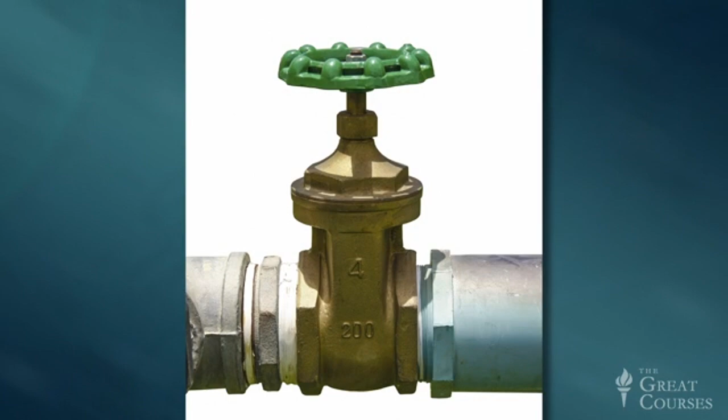But there's a larger usability issue with this faucet design. Another common convention is that rotating a knob to control flow should be analogous to turning a bolt. Clockwise rotation tightens a bolt, and thus it should reduce flow. Counterclockwise rotation loosens a bolt, and thus should increase flow. The valves in your plumbing system operate this way. And the convention makes sense, because many such devices actually do use a screw to open and close an internal stopper, as you can see here.

Now, according to this convention, both knobs on this faucet should close with clockwise rotation, like this, and open with counterclockwise rotation, like this. The problem is that some manufacturers disagree with this convention. They propose an alternate paradigm that controls intended for two hands should reflect the symmetry of the human body, and thus should operate as mirror images of each other, like this.

Well, this concept is quite attractive in theory. But as we engineers are fond of saying, in theory, there should be no difference between theory and practice. In practice, there is. When this mirror image paradigm is applied to a faucet with two knobs, three distinct problems arise. First, we're so conditioned to the traditional convention that when we encounter this alternative convention, we'll invariably turn one knob or the other in the wrong direction on the first attempt.

Second, even if we're expecting the mirror image paradigm, there's no clear convention for which direction is on and which direction is off. So we'll still get it wrong on the first attempt about half the time.

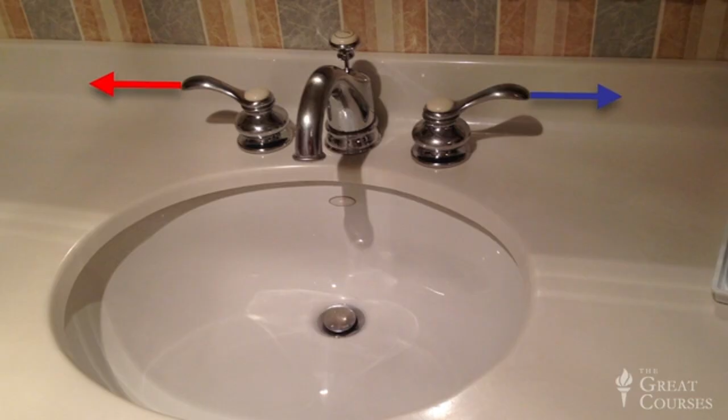Applying the mirror image paradigm to faucet knobs is unequivocally bad design, particularly because the inherent flaws in this paradigm can be so easily corrected. This faucet uses the mirror image paradigm, but its mode of operation is crystal clear, thanks to the simple substitution of handles for knobs. When the faucet is shut off, the handles are both pointed outward, a clear signal that the mirror image paradigm is being used.

It's also clear that both handles must be rotated forward to turn the water on because there isn't enough clearance behind them to allow rearward rotation. Furthermore, the shape of the handle sends a subtle message that they're to be grasped and pulled, further reinforcing our intuition about how they should work. For all these reasons, it's nearly impossible to operate this faucet incorrectly.

Yet another advantage. With the water running, the position of the handles provides a visual indicator of the state of the system. Here, for example, we can instantly see that the stream of water is mostly cold with just a little bit of hot. Knobs don't provide this sort of real-time visual feedback.

Now, these examples illustrate three important points about design for usability. First, the difference between poor design and good design can be quite subtle, but the effects are often dramatic. Second, solely by virtue of their shape, size, and placement, physical objects send us subtle messages about how they can or should be used. These messages are called affordances. And high-quality design invariably takes advantage of affordances to improve the interaction between technological devices and people.

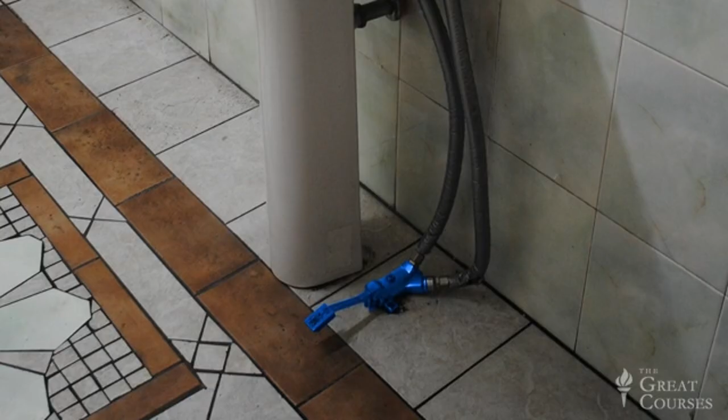I had given up in frustration when the guy next to me said something in Italian, and then he pointed to this foot pedal below the sink. So this was a hands-free sink, but not the type I was expecting. The most common design flaw in hands-free devices is that they lack clear indicators of where the proximity sensor is and how we should interact with it. In Don Norman's lexicon, they lack signifiers.

And only after I finally succeeded in eliciting water from that hidden spout did I realize that my trials and tribulations had also been exacerbated by a considerable time lag between the activation of the sensor and the flow of water.

A feedback issue that's all too common with these evil devices. The sink is the quintessential example of the pitfalls inherent in pursuing style over substance. It looks beautiful, modern, sleek, and uncluttered. But from the perspective of usability, it's a total disaster.

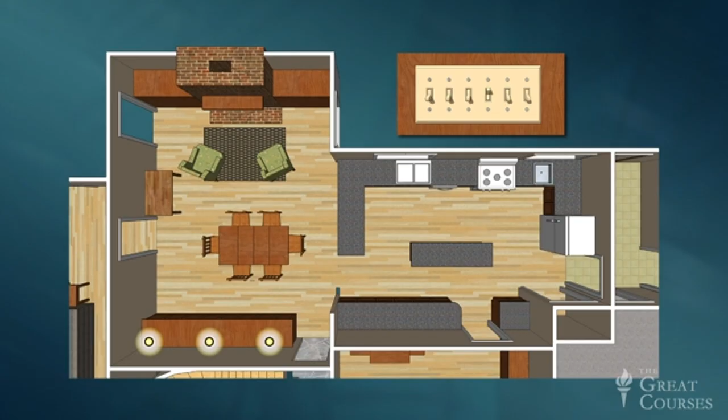This is the floor plan of my kitchen. On this wall is a row of 6 identical light switches. When I flip these switches in order from left to right, the following lights are illuminated. 1, 2, 3, 4, 5, 6. Note that there is no spatial logic to this arrangement whatsoever. And so, even though I've lived in this house for over 2 years, I still select incorrect switches several times a day.

Recognizing that poor light switch mapping is a big systemic problem, Don Norman has developed this fundamentally new concept, an angled panel that displays the floor plan of the room with switches placed in the locations of the lights they control. This is a beautiful design, but thus far it hasn't drawn much attention from either the lighting or the construction industries, probably because it represents such a radical departure from the status quo.

Next, constraints are physical limitations that communicate how a device can or can't be used. The 3-prong plug is a superb example. It's physically impossible to insert this thing into a wall socket in any orientation other than the correct one. A less successful example is the universal serial bus, or USB plug, that's used to connect peripheral devices to your computer.

The USB is successful because the plug will only fit into a USB receptacle in the correct orientation. But it's not entirely successful because the correct orientation is rarely obvious, particularly when the receptacle is oriented vertically.

And finally, our interactions with technology are greatly facilitated by responsive, meaningful feedback. When I press an elevator call button and it lights up, I'm satisfied that an elevator is on the way. But when I press this button at a pedestrian crosswalk, and there's no visible or auditory confirmation that my input has been received, I get increasingly frustrated as time passes.

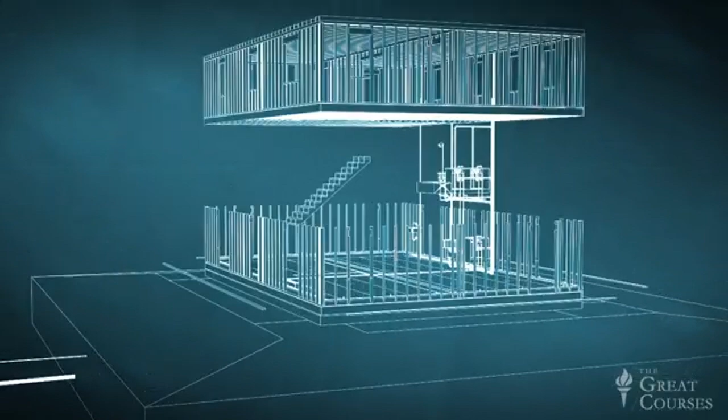For the next 4 lectures, we'll be departing from the comfortable, well-appointed world of your home's living space and entering the austere and occasionally greasy environment of your garage to explore the major technological systems that constitute your automobile. Automotive technology has an immense influence on our everyday lives. When our cars are working as designed, they provide us with nearly unlimited mobility. And when they aren't, well, few events are more disruptive to our everyday lives than an automotive breakdown.

Automobiles are among the most expensive products we purchase. Yet, our ability to make these purchases wisely is often hindered by the bewildering array of functional, aesthetic, and technological alternatives available in the marketplace. In a broader sense, the automobile has also had profound influences on our society, culture, economic development, land use, and environment. Some of these influences have been extraordinarily positive, others dangerously detrimental. All of them derive, at least in part, from the nature of the technology itself. For all these reasons, it's very much in our interest to know more about these machines and how they work.

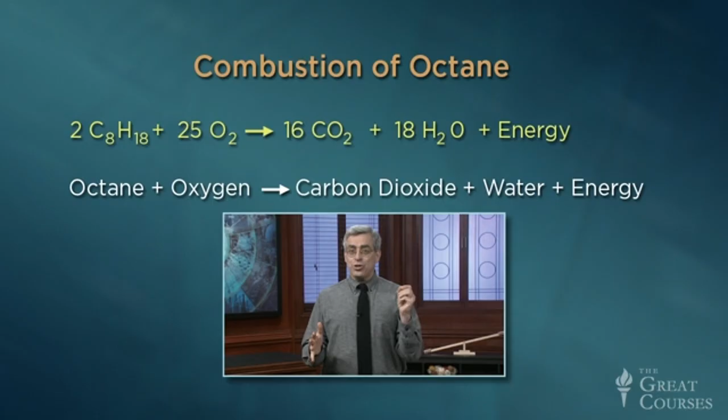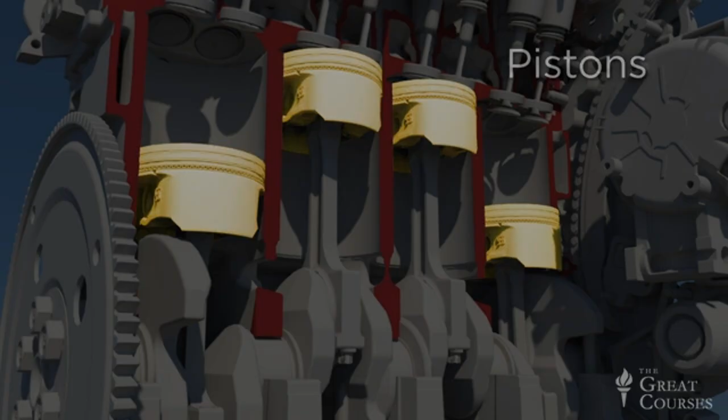The combustion reaction takes place within cylindrical cavities that have been machined into a solid block of iron or aluminum, called the engine block. These cavities are called cylinders, and they're just large enough to accommodate metal pistons sliding up and down within them. Near the top of each piston are several grooves, which hold metal rings that provide a tight seal between the piston and the cylinder walls.

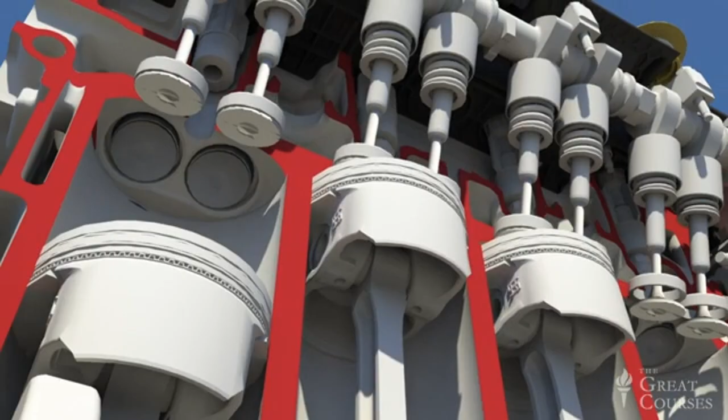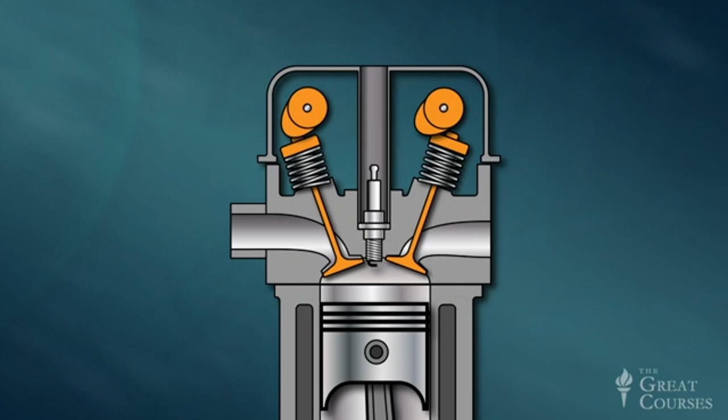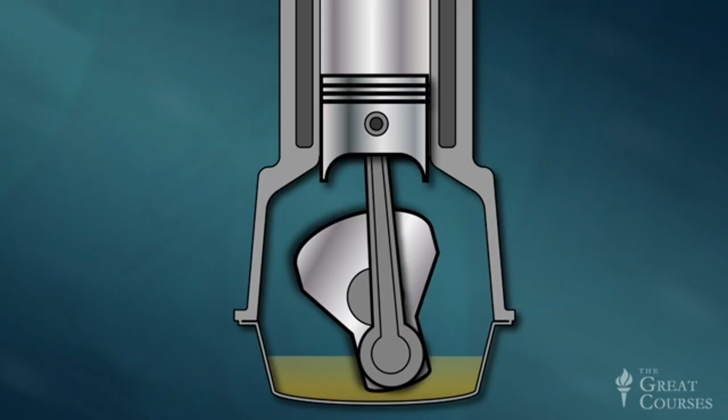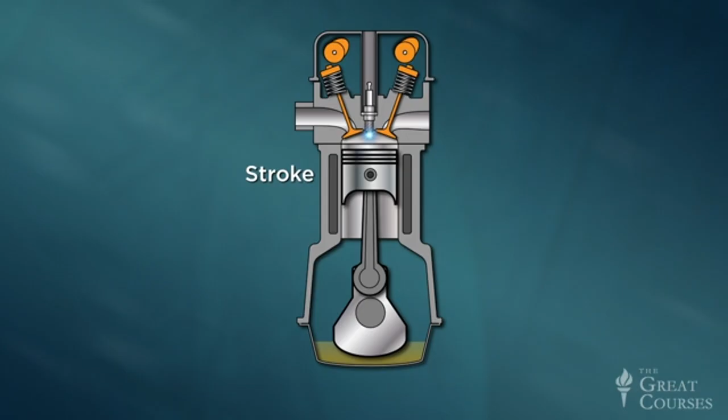And here's how it all works. The up and down or reciprocating motion of the pistons is translated by the connecting rods into rotational motion of the crankshaft, which then delivers mechanical power to the vehicle's drivetrain, the subject of our next lecture. The distance each piston moves within its cylinder is called the stroke, which extends between this position, called top dead center, and this one, bottom dead center.

When the engine is running at normal operating speeds, the pistons are cycling up and down many thousands of times per minute. And because the mass of each piston must be accelerated from a dead stop at the start of each stroke, the engine's efficiency is enhanced by keeping the pistons as light as possible, and that's why they're hollow.

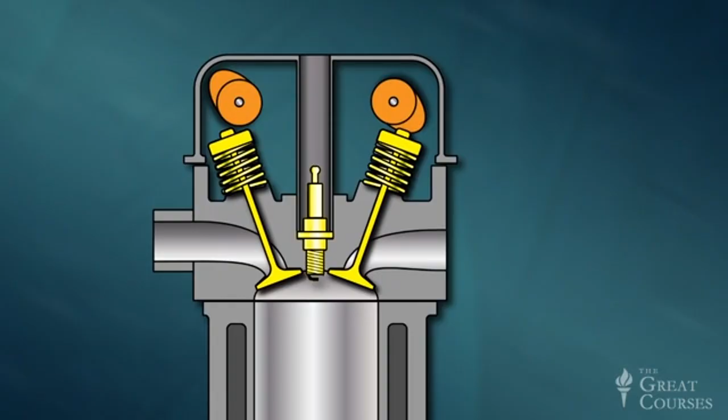Each cylinder is equipped with an intake valve, an exhaust valve, and a spark plug, all of which are mounted within a heavy metal lid called the cylinder head. As this cutaway of a cylinder head shows, the two valves are used to close off intake and exhaust ports, which are cast directly into the head.

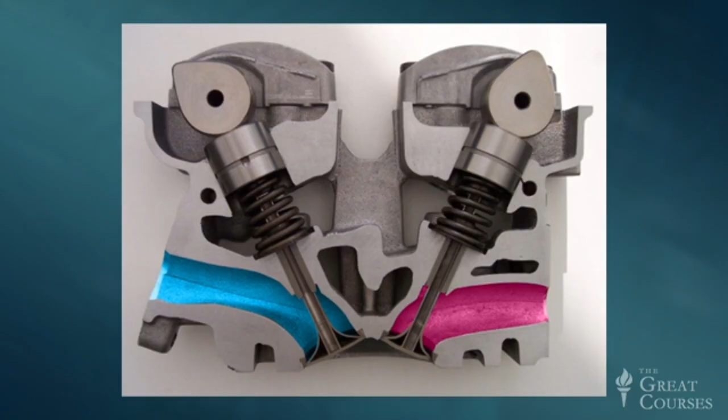Now, we'll discuss many more components of this engine shortly, but these, the cylinder, piston, connecting rod, crankshaft, valves, ports, and spark plug, are the ones that are directly involved in the process of producing mechanical power. So for now, let's focus on this process.

Most automobile engines operate on a 4-stroke cycle, meaning that each piston moves through a sequence of 4 different strokes, each with a specific purpose, and this 4-stroke sequence is then repeated over and over again for as long as the engine is running. We'll begin by examining the 4-stroke cycle for an engine with a simple carburetor, and then a bit later, we'll see how it works with the carburetor's modern replacement, fuel injection.

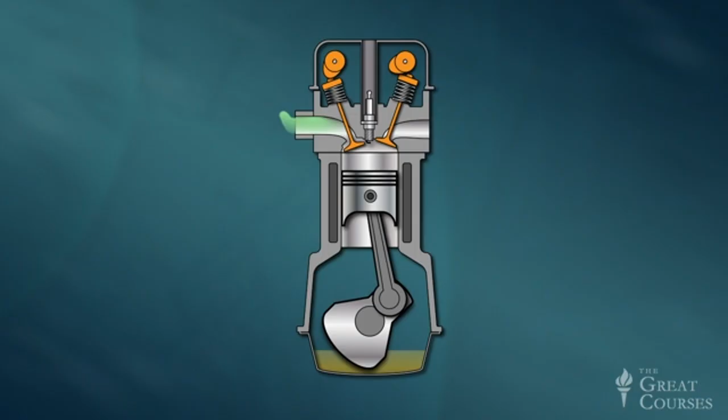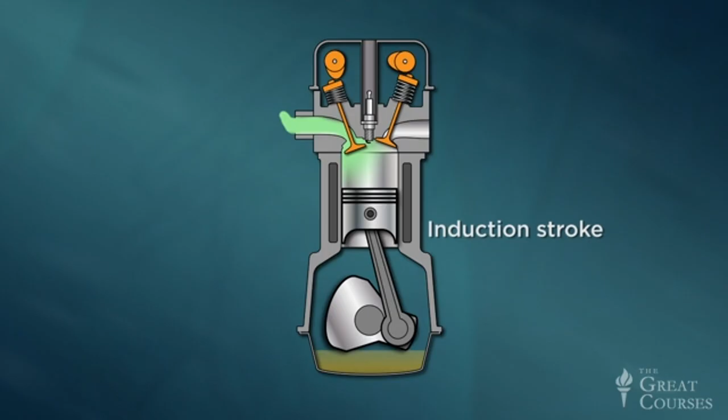The first of our 4 strokes is the induction stroke, during which the piston moves downward in its cylinder and the intake valve opens. A mixture of fuel and air is drawn from the carburetor through the intake port into the cylinder, and then the valve closes. Now, during the compression stroke, the piston moves back upward. Both valves remain closed, so the fuel-air mixture is now compressed and its temperature increases simultaneously.

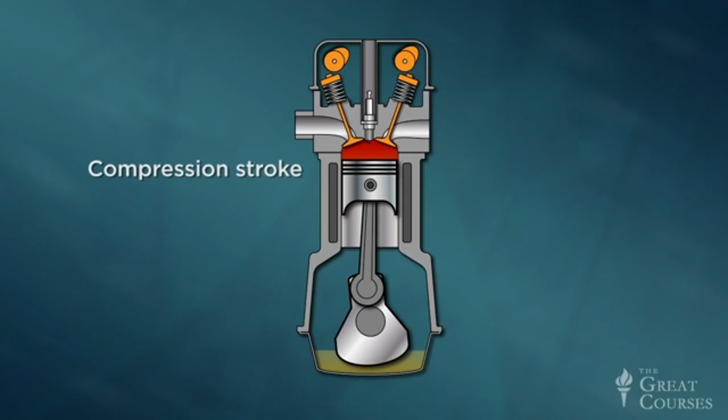Just before the piston reaches top dead center, a pulse of high voltage is sent to the spark plug, causing an electric arc to jump the gap between these 2 electrodes. This is essentially the same phenomenon we identified as flashover in our lectures on electric power transmission and distribution.

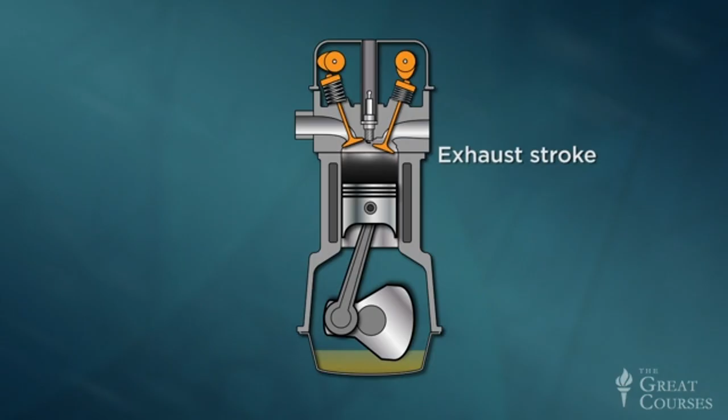Within the cylinder, this electric arc ignites the compressed fuel-air mixture, initiating the combustion reaction we discussed earlier. The resulting heat causes a very rapid increase in pressure, which drives the piston back downward, and this is the power stroke. Finally, during the exhaust stroke, the exhaust valve opens, and the piston moves back upward, expelling the cylinder's contents into the vehicle's exhaust system.

These contents include the 2 byproducts of the combustion reaction, water and carbon dioxide, plus a lot of nitrogen, a major constituent of the air originally introduced into the cylinder. The exhaust also includes a small amount of pollutants: unburned fuel, carbon monoxide, which is produced by incomplete combustion, nitrogen oxides, produced by the unintended reaction of nitrogen and oxygen, and soot. We'll see what happens to this stuff when we discuss the exhaust system shortly.

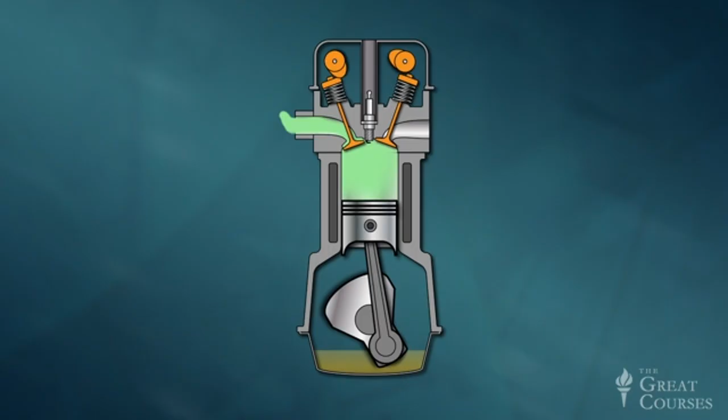Note that in the 4-stroke cycle, each stroke corresponds to 1/2 rotation of the crankshaft, but power is produced during only 1 stroke. So what keeps the piston moving up and down during the other 3 strokes? Why, the other pistons, of course. This is the principal reason why most automobile engines have 4 or more cylinders. The 4-stroke cycles of the cylinders are staggered, such that each has its power stroke at a different time.

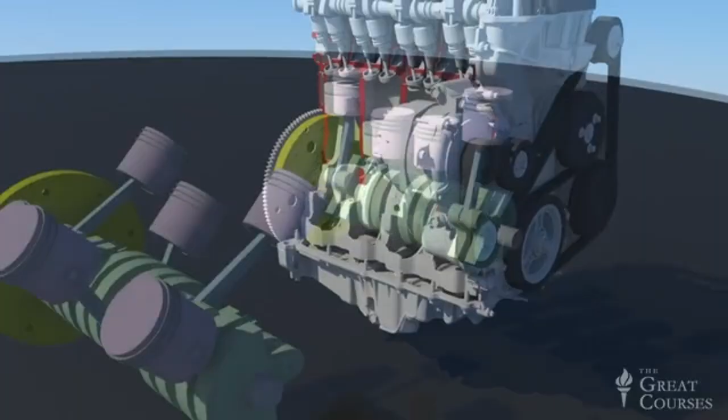Cylinders can be arranged in these 3 different configurations: inline, V, and horizontally opposed. Note that in each case, the firing order is designed such that power strokes from different cylinders are delivered at different times. So the intake, compression, and exhaust strokes for a given cylinder are driven by the power strokes of the other cylinders. Note also that the motion of the pistons is always balanced.

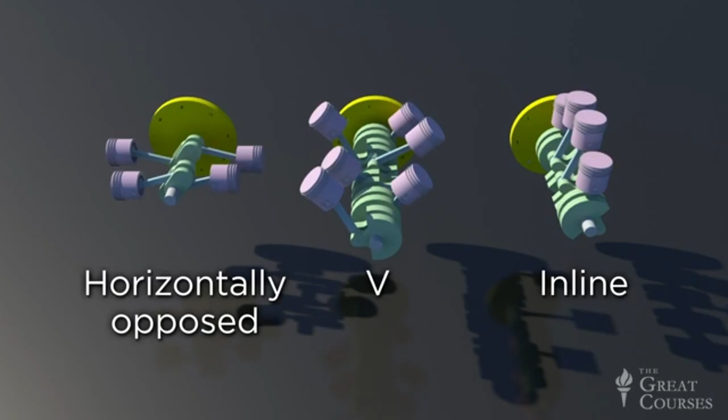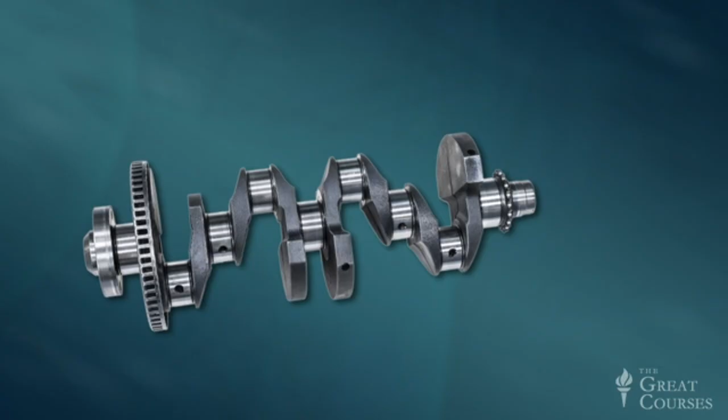At any given moment, half of the pistons are moving upward or outward, and the other half are moving downward or inward. If they weren't balanced in this way, the engine would vibrate tremendously. The alternating motion of the pistons is controlled by the crankshaft, which has three important characteristics worth noting.

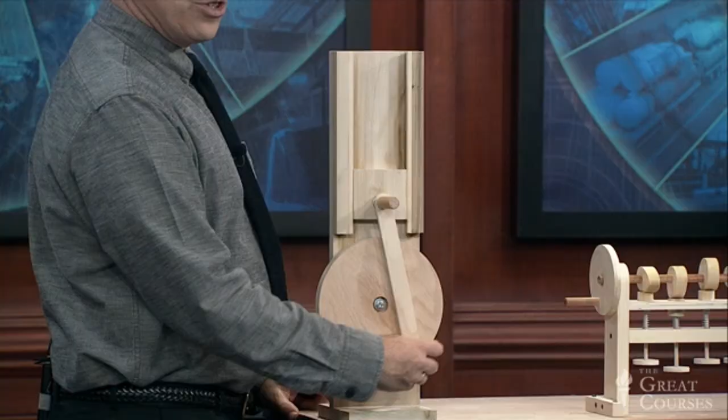First, these offset sections of the shaft, called crank pins, are the mechanism by which the reciprocating motion of the pistons is converted to the rotary motion of the shaft. In this sense, the crankshaft really works like any other crank. This model illustrates how a simple crank converts rotary motion into the reciprocating motion of a piston through a connecting rod. The system works in the other direction as well, like this.

But note that it doesn't really work as well, because the piston tends to get stuck either at top dead center or at bottom dead center, where vertical movement of the piston won't turn the crankshaft. This is another reason why automobile engines have multiple cylinders, so each cylinder can have its power stroke in the position where the resulting torque is maximized, like this, and when it's in this position, bottom dead center, a different cylinder will keep the crankshaft moving, like this.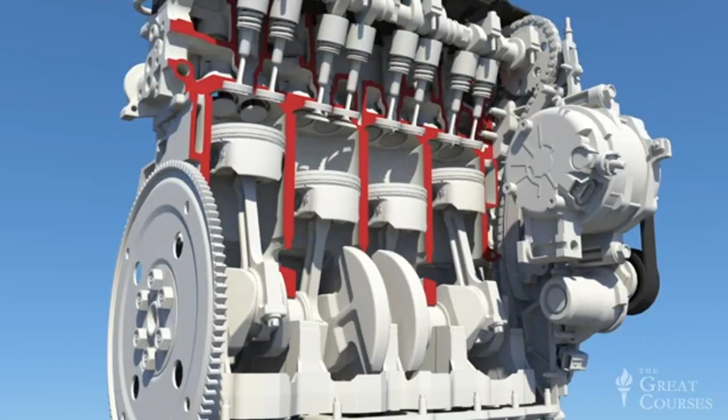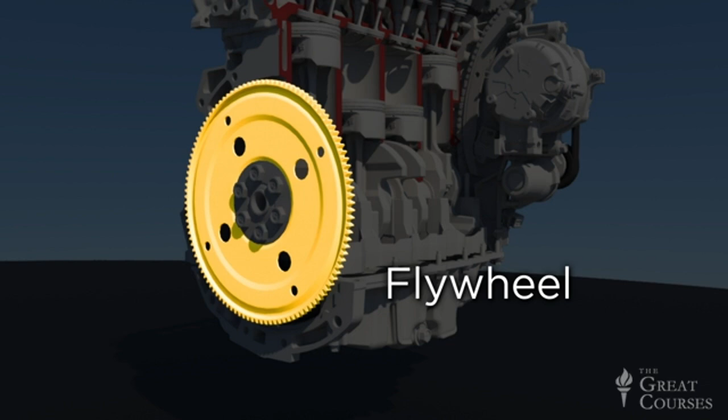The second important characteristic of the crankshaft is that it incorporates counterweights, like these, which balance the offset weight of the crank pin to reduce vibration. And third, the crankshaft always incorporates a flywheel, a heavy wheel fixed to the end of the shaft to smooth out the discrete pulses of torque that are delivered to the shaft intermittently by the individual pistons. We'll discuss the flywheel in greater detail in the next lecture.

By the way, the number and arrangement of cylinders used in an engine is based on a couple of factors. Using more cylinders generally produces a smoother running engine, but also causes greater complexity. And the V and opposed configurations result in a more compact engine for a given number of cylinders. Thus, inline six-cylinder engines used to be quite common, but today they've almost been entirely replaced by V6s, which fit more comfortably in the engine compartments of smaller cars.

Well, we've now seen the four-stroke cycle in action, but it's important to recognize that we've only really seen it in slow motion. In an engine running at 4,000 revolutions per minute, the complete four-stroke cycle occurs 2,000 times per minute, or 33 times per second. That's one full cycle of induction, compression, power, and exhaust every 3/100ths of a second.

With that in mind, you might be wondering, how are the valves opened and closed with such precision? How is the correct air-fuel mixture introduced into the cylinder during the induction stroke? How does the spark plug fire at just the right moment to initiate the power stroke? How are all those combustion products removed from the automobile, and how are the fumes made safe enough to be released into the atmosphere? How is the heat from thousands of explosions per minute dissipated from the engine block?

How is the sound from thousands of explosions per minute controlled? And how are all those moving parts lubricated to keep them working freely and prevent excessive wear? The answers to these questions can be found in 7 additional engineered subsystems of the internal combustion engine: the valve train and the fuel, electrical, ignition, exhaust, cooling, and lubricating systems. Every one of these subsystems must operate in perfect synchronization, or the engine simply won't run. Let's look at each of them, starting with the valve train.

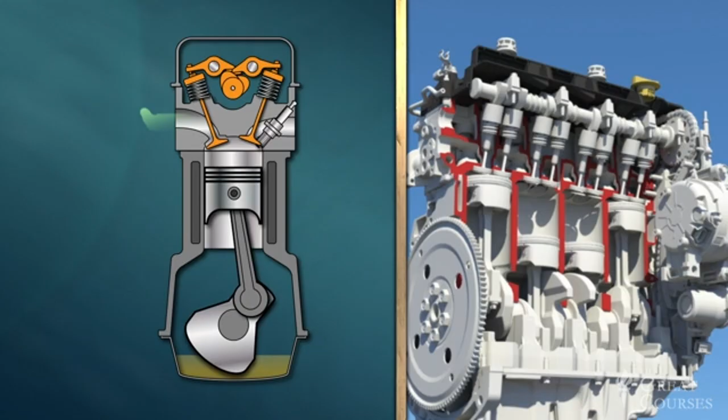In most modern engines, camshafts are mounted above the cylinders in one of the two configurations shown here. On the left is a single overhead camshaft engine, with one camshaft activating 2 valves per cylinder through these rocker arms. On the right is a dual overhead camshaft engine with 2 camshafts driving 4 valves per cylinder directly, without rocker arms.

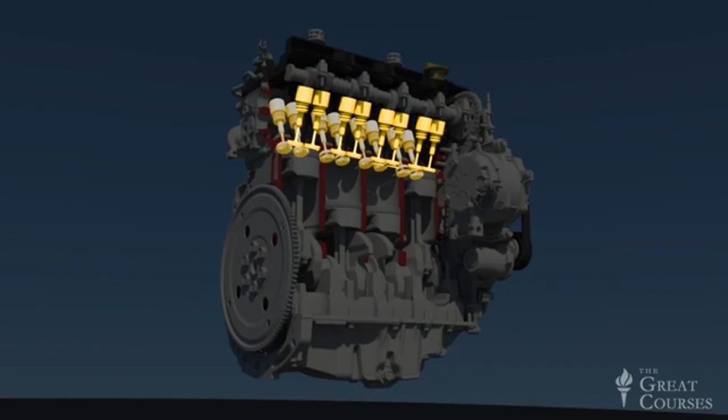This latter configuration is used for high-performance engines where the 4 valves, 2 intake and 2 exhaust, provide increased power by enhancing airflow into and out of the cylinder.

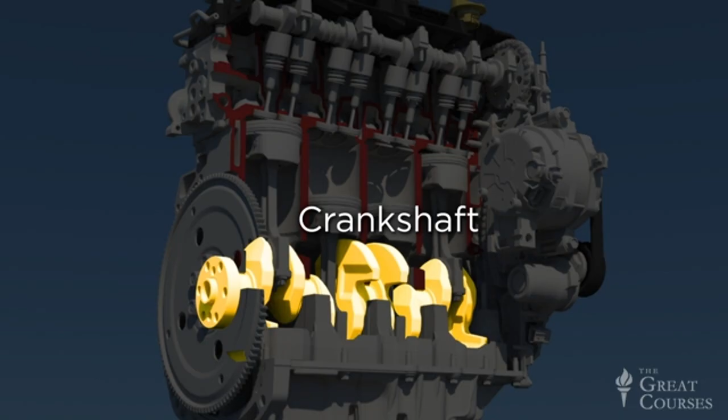In either case, the camshaft is rotated by a belt or chain called the timing belt or timing chain, which is driven by the crankshaft. These drive sprockets are sized such that the camshaft rotates once for every 2 rotations of the crankshaft. Thus, each rotation of the camshaft corresponds to 1 4-stroke cycle.

Next, the fuel system. Until the 1980s, most spark ignition engines used a carburetor to achieve the correct fuel-air mixture to support the combustion in the cylinders. In a carbureted engine, outside air is drawn through an air filter into the body of the carburetor, which has this narrow throat at its center.

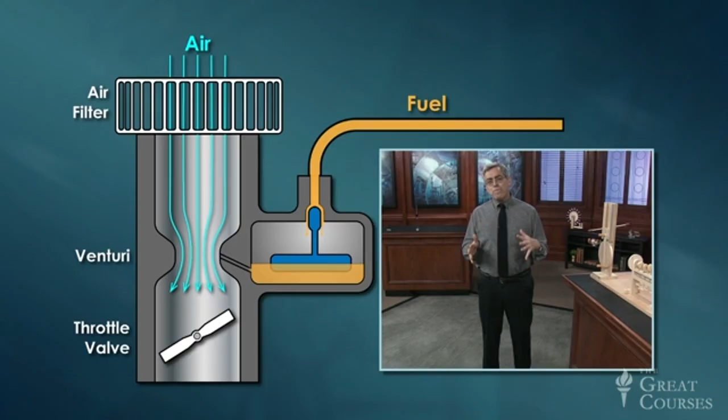Here we see another application of Bernoulli's principle, which we first discussed in the context of wind flowing over a building. Bernoulli tells us that when air flows through this throat, called a venturi, its speed increases and its pressure decreases. At the point of lowest pressure, a small tube is connected to a fuel reservoir called the float chamber. Because of the low pressure in the venturi, a calibrated stream of fuel is sucked from the float chamber into the airstream.

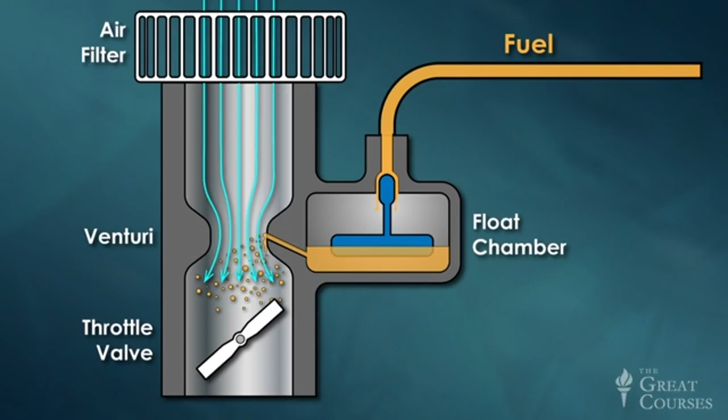Below this throat is a rotating gate, the throttle valve, which is mechanically connected to the driver's accelerator pedal. When the pedal is depressed, the throttle valve opens and the flow of fuel and air into the engine is increased. The fuel-air mixture passes from the carburetor to an intake manifold, which divides the flow equally among all the cylinders.

Now, carburetors haven't been used in automobiles since 1990, but they're worth knowing about because you're still likely to find one on your lawnmower or snowblower. But for today's automotive fuel systems, the name of the game is fuel injection, which provides more power, better fuel economy, and better emission control.

The ECU monitors the throttle position and the amount of oxygen in the exhaust to determine just the right amount of fuel to deliver at any given time. Because multi-port injection supplies fuel upstream of the intake valve, the operation of the 4-stroke cycle in a multi-port injected engine is essentially identical to that of a carbureted engine.

However, some high-performance gasoline engines and most diesel engines use direct injection of fuel right into the cylinder. In these engines, the induction stroke draws in only air, and the fuel isn't injected until near the end of the compression stroke. This allows the fuel to be injected at higher pressure, resulting in a finer mist that greatly improves the combustion process.

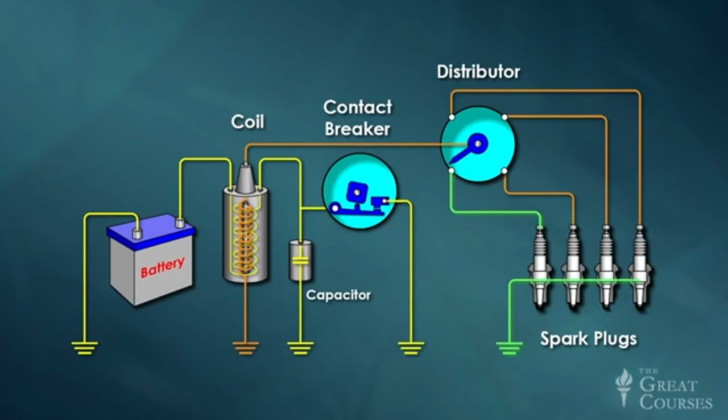In modern engines, the single coil and distributor have been largely replaced by an alternative configuration that performs the distribution function electronically at low voltage, and then uses a separate coil for each cylinder to boost the voltage immediately ahead of the associated spark plug. The result is significantly better control over the timing of the spark, which improves power, fuel consumption, and emission control. And because distributors normally wear out relatively quickly, these distributor-less engines require significantly less maintenance.

While we're on the subject of ignition, I should mention that compression ignition, or diesel engine, works essentially the same way as the spark ignition engine, except that it has no spark plugs, and relies instead on spontaneous combustion of the fuel-air mixture at very high pressure. Thus, in a diesel, the induction stroke draws in only air. The compression stroke achieves significantly higher pressure and temperature than would be the case in a spark ignition engine. Fuel is injected directly into the cylinder near top dead center, and combustion occurs spontaneously, without an externally supplied spark, as soon as the fuel is injected.

And if you don't believe that a flammable material can burst into flame solely through the application of pressure, remember what happens to a piece of tissue paper when I compress the air in this cylinder. In general, diesel engines provide more power and better fuel economy than the equivalent spark ignition engine. However, because they operate at higher pressure, they must be significantly heavier, and so they're usually used for larger vehicles like trucks and locomotives.

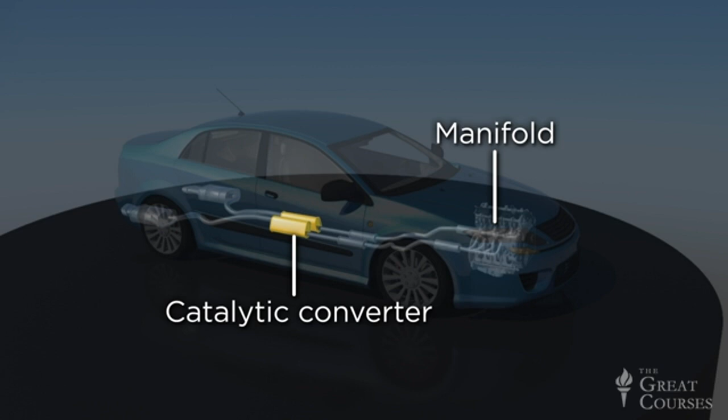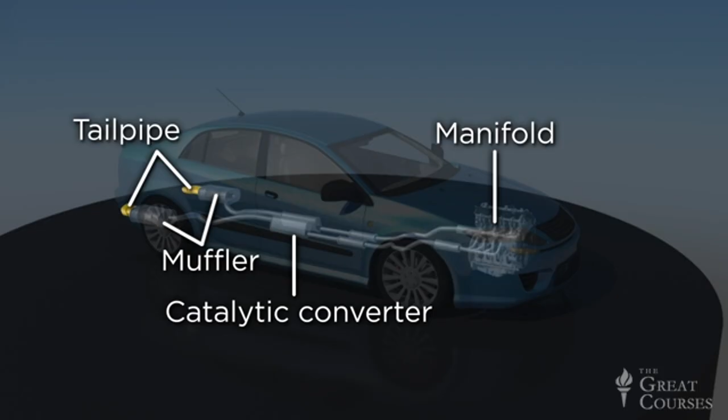Whether for a gasoline or diesel engine, the automotive exhaust system typically consists of an exhaust manifold, which collects up the combustion products from the cylinders, a catalytic converter, which substantially reduces the amount of carbon monoxide, nitrogen oxides, and unburned hydrocarbons in the exhaust stream, a muffler, which dampens the sound of those thousands of explosions per minute occurring in the cylinders, and a tailpipe, which routes the exhaust stream out into the atmosphere. To do its work, the catalytic converter requires oxygen, and so the system includes sensors that monitor the amount of oxygen in the exhaust stream. If it's inadequate, the engine control unit increases the quantity of air entering the engine.

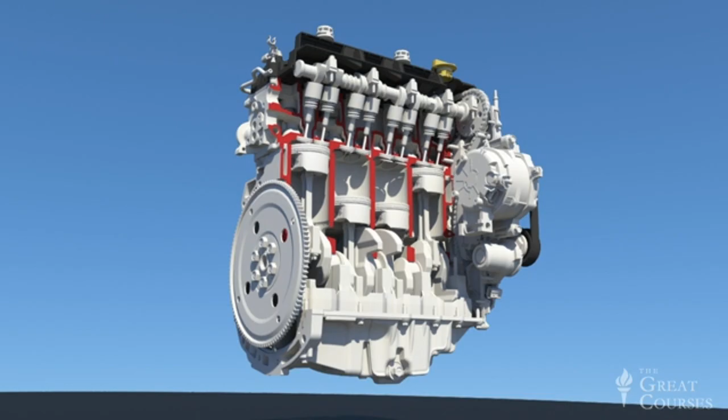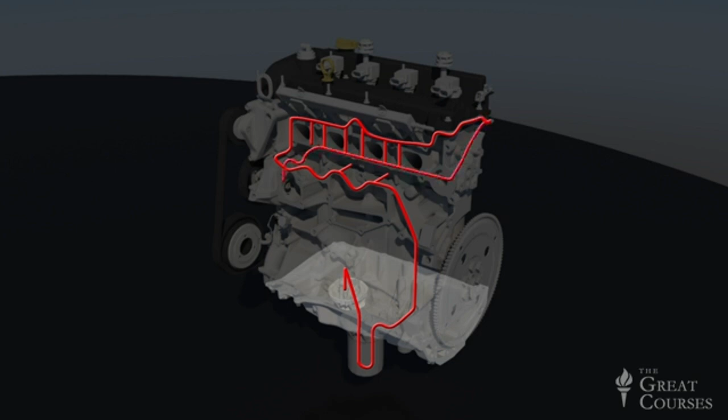The internal combustion engine also includes elaborate systems for lubrication and cooling. A reservoir of lubricating oil is contained in the oil pan, which encloses the underside of the crankcase. An oil pump, driven by the crankshaft, draws oil from the sump, passes it through a filter, and then circulates it at high pressure through a maze of channels and passages to every moving part in the engine. After doing its job, the oil trickles back down into the oil pan, where the cycle begins anew.

Now, over time, the oil does get contaminated, primarily by tiny particles of metal resulting from the abrasion of the many metal parts that move in contact with each other throughout the machine. And that's why your oil and filter need to be replaced periodically.

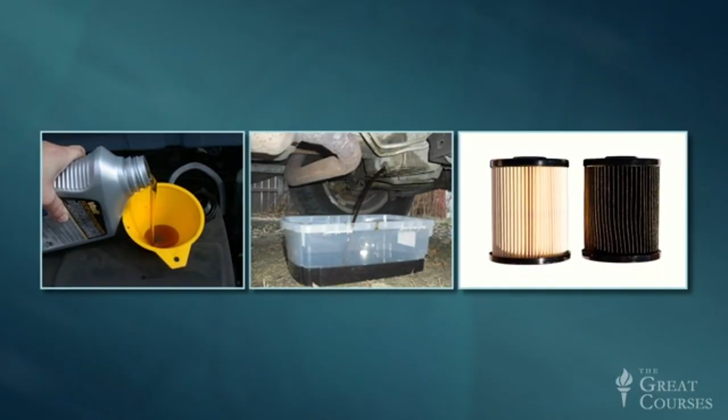In the cooling system, a mixture of water and antifreeze is pumped through a network of passages in the engine block to carry heat away from the cylinders. This coolant is then circulated through the radiator, which is really just a heat exchanger, similar to the ones we've seen in your home's heating, ventilating, and air conditioning system.

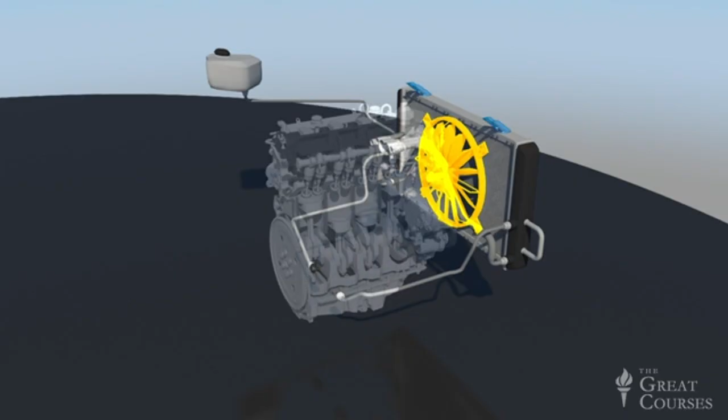A fan blows across the radiator to assist with the transfer of heat from the coolant into the atmosphere. And that, my friends, is the internal combustion engine in all its glory. Now that we've seen how this beautifully integrated system operates, I'd like to spend a few minutes exploring the science underlying the four-stroke power cycle at its heart.

Now, you'll recall that earlier in the course, we were able to glean important insights about refrigeration by modeling it as a thermodynamic cycle, represented as a series of four thermodynamic processes plotted on a graph of pressure versus volume. We can do the same for internal combustion, subject to an important caveat that I'll discuss next lecture.

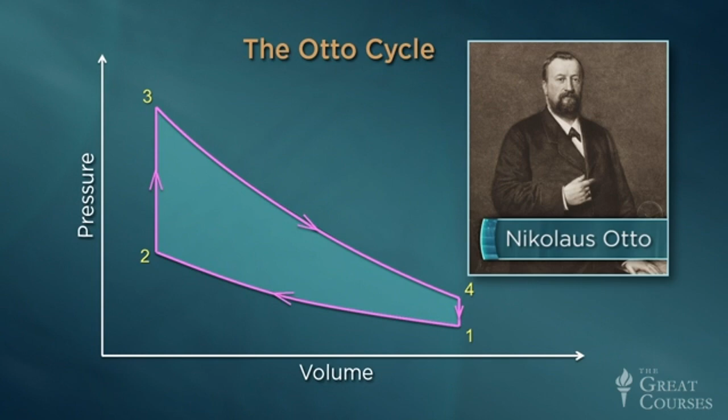The result, shown here, is called the Otto cycle, named for the 19th century German engineer Nikolaus Otto, who built the first working four-stroke engine in 1876. I swear I'm not making this up. The Otto engine was invented by a guy named Otto.

In the Otto cycle, the thermodynamic system is the air contained within one cylinder of the engine. On our graph of pressure versus volume, the cycle begins at state 1, which represents atmospheric pressure, and the volume of the cylinder with the piston at bottom dead center.

Process 1-2 is the compression stroke, reflecting a simultaneous increase in pressure and decrease in volume, with the volume at state 2 corresponding to the space above the piston at top dead center.

Process 2-3 represents the sharp rise in pressure occurring with the combustion of the fuel-air mixture. Given that the volume is constant during this process, we can see that the Otto cycle assumes that the process occurs instantaneously with the piston at top dead center just before the power stroke begins.

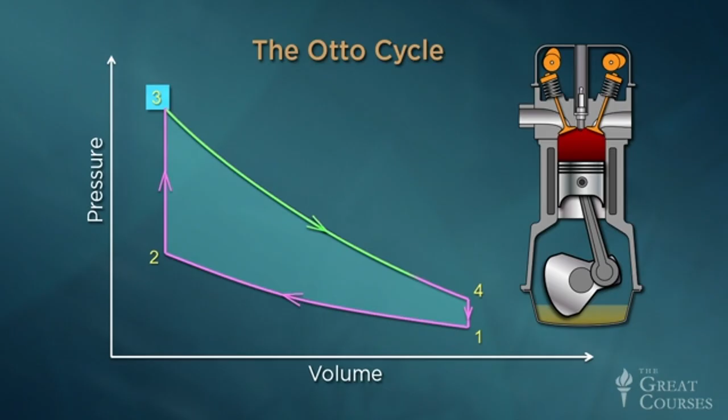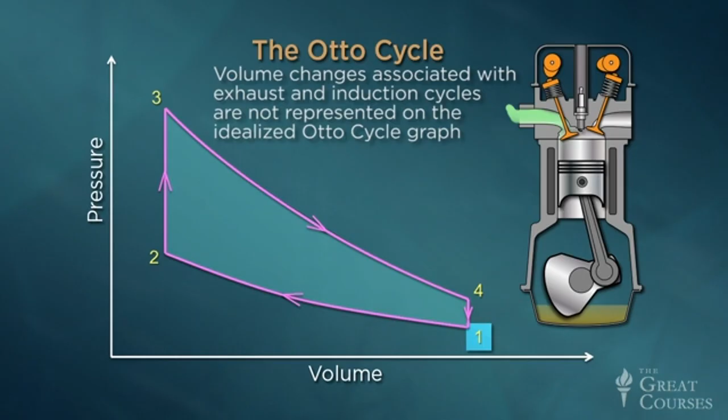Process 3-4 represents the actual power stroke, with its corresponding decrease in pressure and increase in volume. And finally, process 4-1 represents the rejection of heat from the cylinder during the exhaust stroke. And, as should be the case with any thermodynamic cycle, we're back at state 1 where we began.

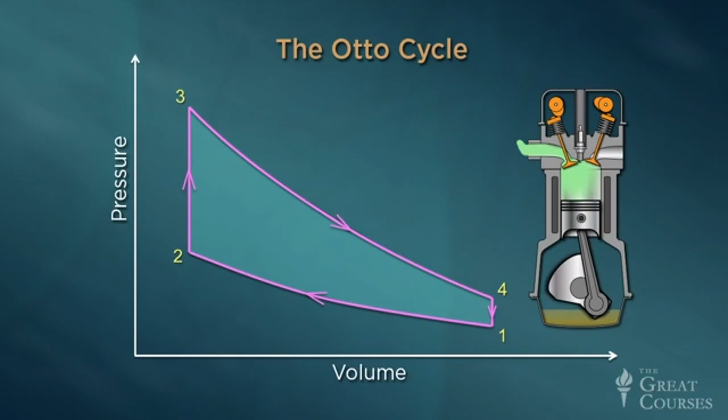Now, in addition to helping us visualize the thermodynamic processes that occur many thousands of times per minute in an internal combustion engine, the Otto cycle also allows us to gain some important insights about engine performance. These insights derive from the fact that for a fluid in a confined space, pressure acting through a change in volume does mechanical work. Thus, pressure times change in volume equals work.

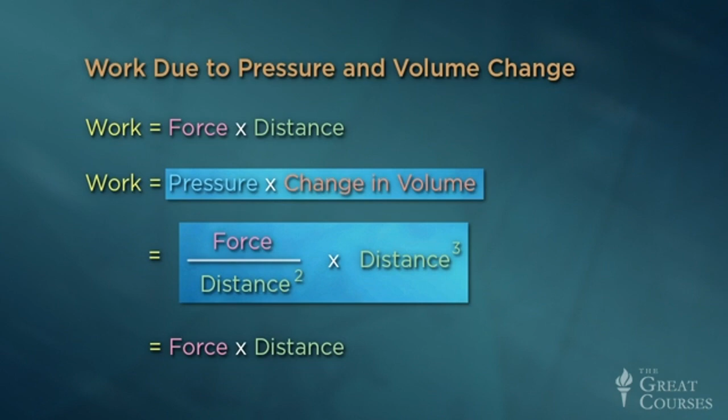We can prove this to ourselves with a simple dimensional analysis. Recall that work is expressed in units of force times distance. Pressure is expressed as force divided by distance squared, and volume as distance cubed. Thus, when we multiply pressure by volume, we get units of work.

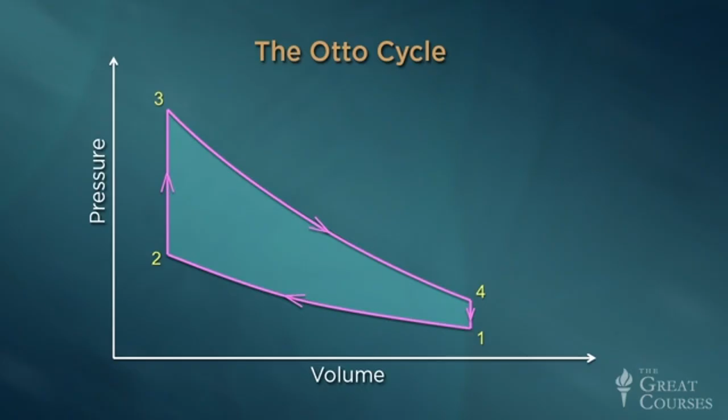This mathematical relationship can be represented graphically on our pressure-volume diagram of the Otto cycle. If pressure times change in volume equals work, then the work done during each process of the cycle is simply the area under the associated curve.

Thus, the area under process 1-2 is the amount of work input required for the compression stroke. In other words, this is the work done by the engine's other cylinders on the single cylinder we're representing in this graph. The area under process 3-4 is the amount of work output due to the power stroke.

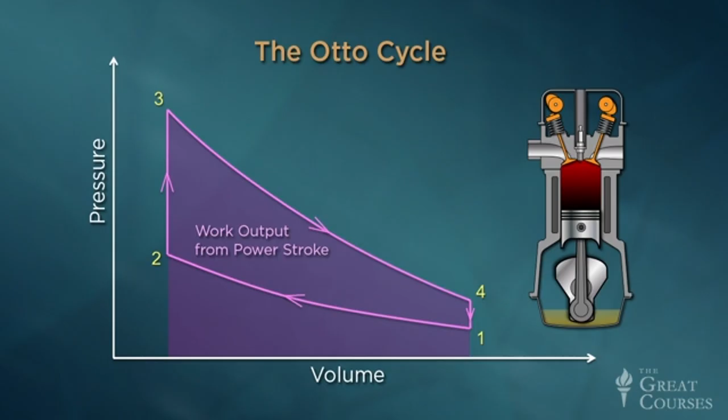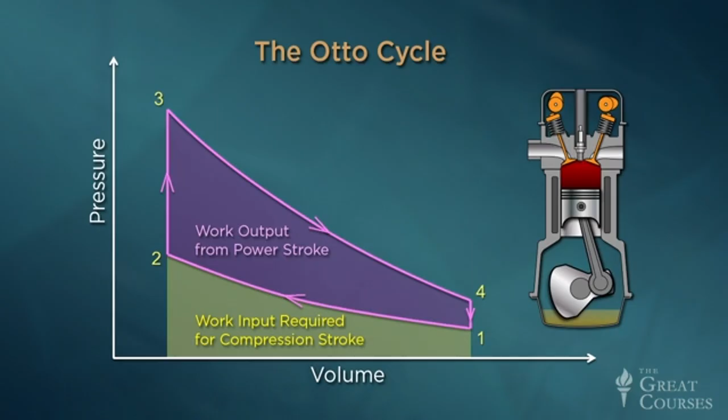There's zero area under processes 2-3 and 4-1 because there's no volume change. So we know these processes do no work at all. And because the net work done by this cylinder is the work output minus the work input, we can visualize the net mechanical work done by one piston during one four-stroke cycle as this area minus this area, leaving us with the area enclosed within the Otto cycle loop. This is an extraordinarily important result.

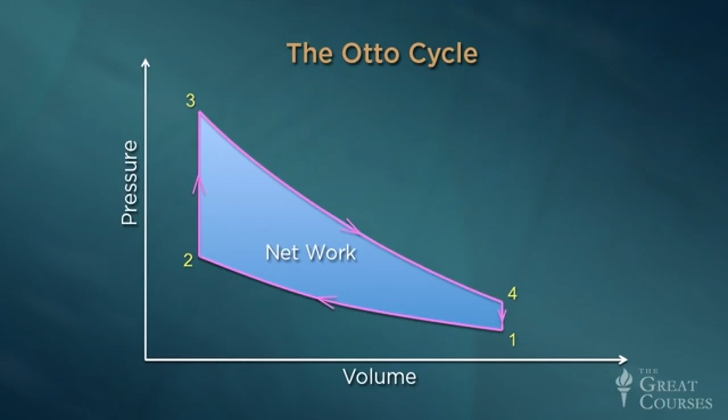As we'll see next lecture, the work done by a piston is directly proportional to the torque delivered to the crankshaft, and as you already know, work per unit time is power. Thus, the two most important characteristics of an automobile engine, its torque and its power, are directly related to this area enclosed within the pressure-volume diagram of the Otto cycle. As such, we can increase torque, increase power, and improve efficiency, all by adjusting the shape of this graph.

In the next lecture, we'll explore this concept more fully. And then, once we've gained a thorough understanding of the power produced by an internal combustion engine, we'll figure out how to get that power from the crankshaft to the drive wheels through another mechanical marvel, the automotive drivetrain.